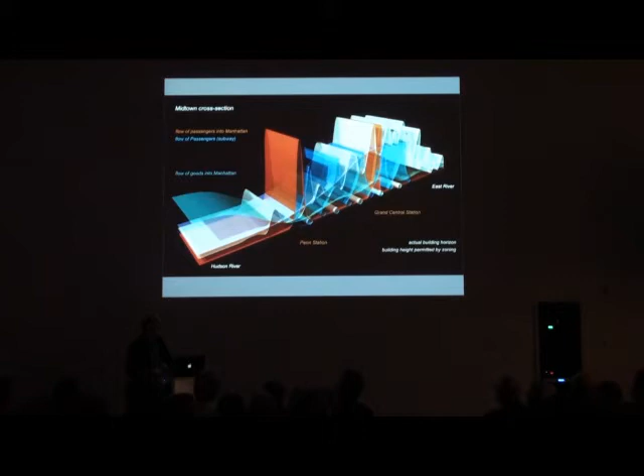Further on in this diagram, we started to develop a technique we called deep planning, whereby user groups, time, publicness on the site, accessibility, and how user groups were connected to the program on the site were researched.

This whole idea of deep planning then transformed into new models of design, maybe we'd call it now parametric design. But you have to imagine this study was done in the beginning of 2000, or even earlier, whereby some of it was not only there to introduce new formal languages for what we did with the computer, but purely to introduce new instruments for design, new forms of communication, new ways of delaying conclusions in design.

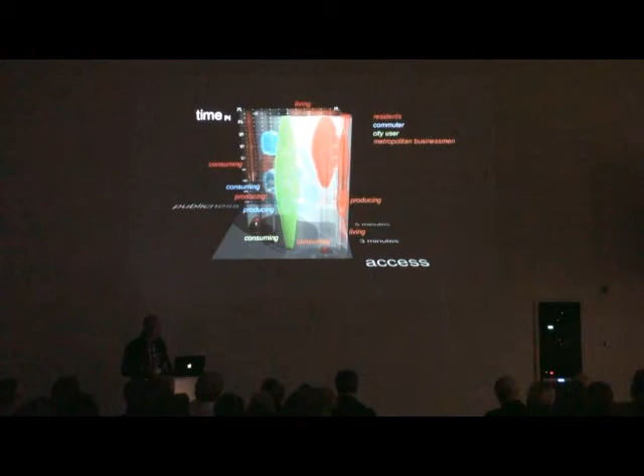I'd like to combine it with another argument - that we introduce a new reading in how one can understand program today. I start with the project we did in Korea, a department store for the Galleria. It was a really strange client, asking us in the beginning: can you rethink the department store in a totally new way?

We thought it strange in that sense, but then we discovered that the client was after something that would go beyond what was purely related to commerce alone. Today we know how difficult and important it is not to be so direct with clients interested in the iconographic or economic subtext of a project. We were so happy with a client who was fascinated by a project but could think beyond its own product.

We worked with the idea that a department store could be seen similarly to a museum, a place where lights give products particular attention. But for us the most important thing was the public spaces within the building itself, whereby in this escalator zone, for instance, you would see in the mirrors or half-shiny glass the way you might see your colleagues, friends, or family you walk with, so that the public space becomes a kind of catwalk within the building.

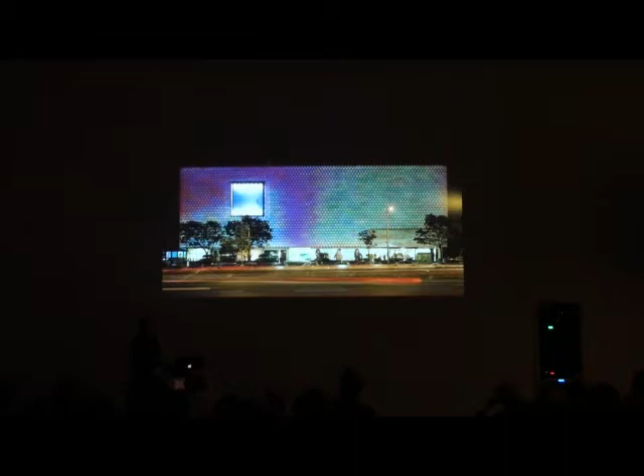This was quite early, around 2004. It was one of the first large LED facades introduced with a highly complex program, whereby we could change this building through all these colors, as you see here. So the idea was to rethink the program and give it a twist, another interpretation, a double reading, so the building becomes more public than only being there for the product alone, maybe highlighting the product on another level by giving it counter forces toward the public spaces.

As I said, this was a test, and it became successful, because a lot of people came back to the building and referred to it as a social meeting place within the city of Seoul.

Talking about this twist, in the Mercedes-Benz Museum we tested this idea on a literal level—almost on a formal level—so that the twist incorporates the construction, the opening up of moving from one floor to the other, whereby you suddenly get a vista toward the other layers within the building. This is a building with two spirals going down, up and down, and it's sometimes very difficult to know if you have already been there or there in the building.

This moment of the twist in perception is something you have to discover while going through the building, as if you were walking in a time machine, within the way this time machine generates so many different times as you walk around it.

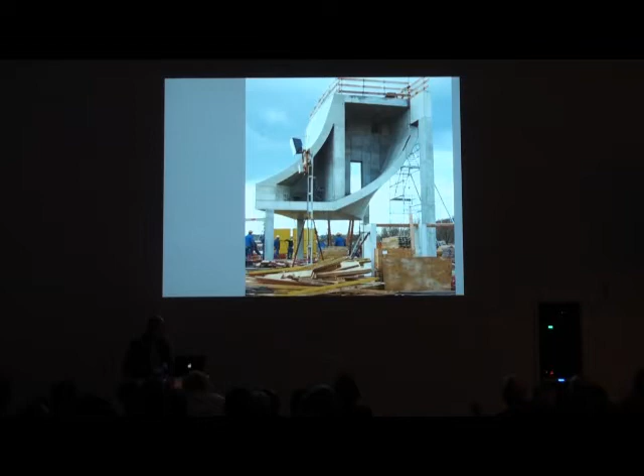We tested it at a one-to-one scale several times to see if the details of this part of the construction, repeated four times over the whole structure, could be built so that, with its casting techniques, it could easily be repeated within the structure of the project.

The organization of the building is such that you have the central atrium. Some of the exhibitions have an internal view and some have an external view. And as you can see, none of the floors match—they're all stepping up and down at different heights.

The central core, or 3 cores, are holding up the construction, but the construction is not guided only by these cores alone. The whole movement between the facade moves towards the floor and bends in a twist, which comes back here and there, and you see it partly here. They also hold up the construction on this part of the building, and in the facade we had a series of columns to hold up the span of almost 33 meters in the exhibition spaces.

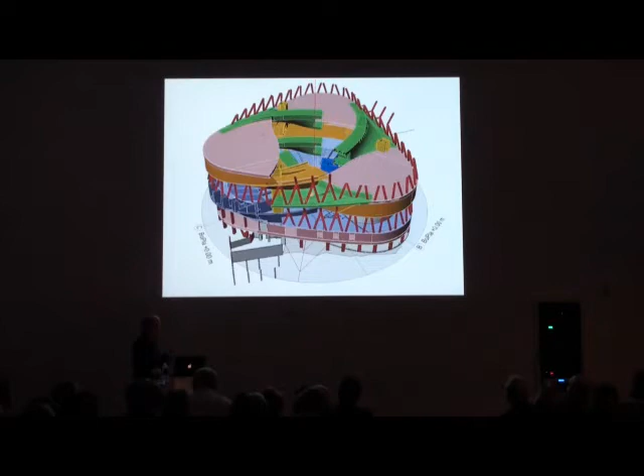You can see that here quite well, so here the twist is repeated 4 times within the building. But as I said, the diversity and complexity of the project is, in that sense, disciplined through these twisting constructive elements within the project, and creates a way of how this building is pulled together.

The principle of it is similarly related to this model, as you can see here. It's, as already said in the introduction, a mathematical model, in this case a trefoil structure, but the trefoil is here turned into a 3D model. You can see here that if you would build this model in the size of the museum itself, it needs almost no central structural element, because that's what we discovered in many other mathematical models - they adopt very easily architectural principles like construction.

Here, like we noticed from the Möbius strip - if you take a piece of paper and bend it over itself, the Möbius structure, in a band of paper, holds itself up. Similarly with this mathematical model, it gave us a fantastic opportunity to be almost, I would like to say, self-supportive.

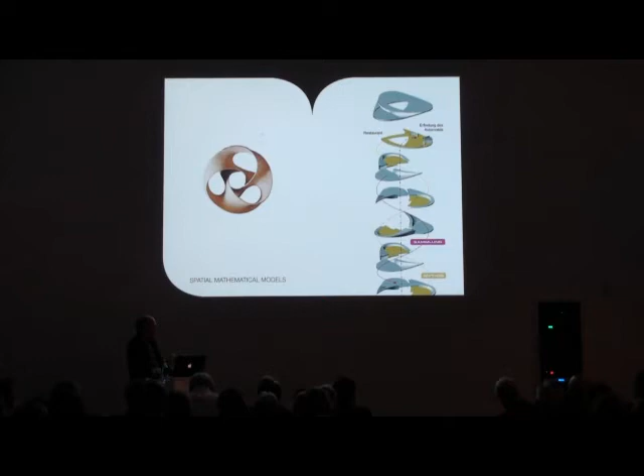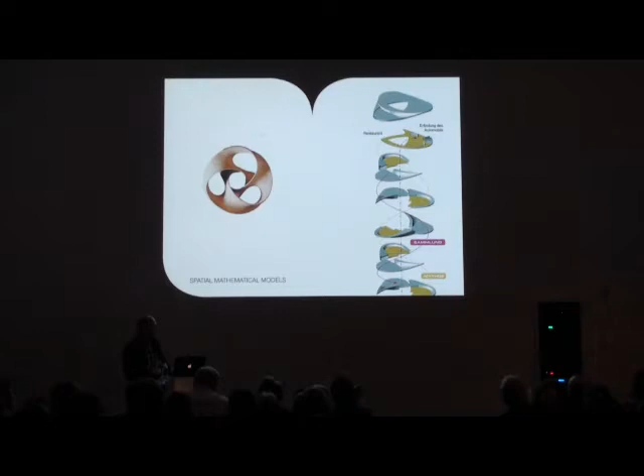As maybe seen here, the building is organized so that you take 3 elevators, and you come up at the top of the building, where one part moves through the history of the exhibition spaces, and another part moves through the collection spaces in the building. Sometimes you have these open view exhibitions, and sometimes a more internal view exhibition. But as I said, the 2 spirals are sometimes combined so that you can step over from one space to the other, creating this diversity and double route of the museum.

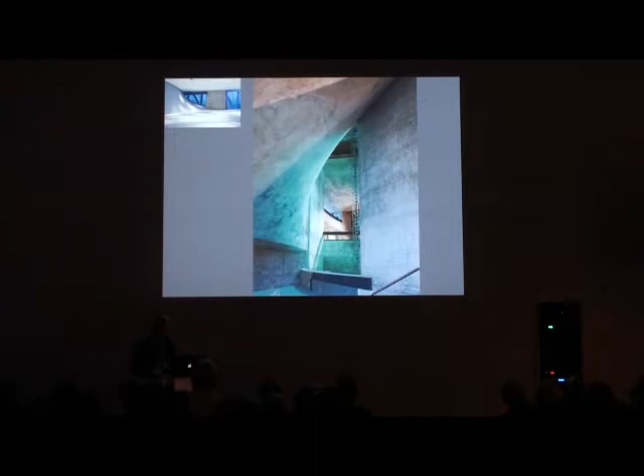Also here I'd like to explain that this client was not interested purely in a showroom. And in that sense we were lucky, because we had a dialogue similarly like what I said about the first project, about what could it be so that this building could be more than only a showroom.

Winning the competition, one of the directors told us they were so fascinated by our idea of how you would walk through the museum and perceive the objects within the building - you would step in higher in the space, like maybe this balcony, walk down and slowly come closer to the object, seeing it from different angles, different heights, different layers of experience, and then be able to choose what you want to see. You would select when you come closer to the car.

Actually this is what I used from many other possibilities I could not achieve in other designs or other buildings for museums I had designed. So all that was projected in this earlier part of the competition we designed.

But the director was so fascinated by the idea that he said it would be so great if he could see more museums and think more about the museum as a place where this car could be presented, and he referred to the MoMA. His argument was that if you step into the MoMA, the first thing you see is the helicopter hanging above you, arguing that a product like the helicopter is also an industrial design - so why couldn't the car, like a helicopter, be an art piece in a museum?

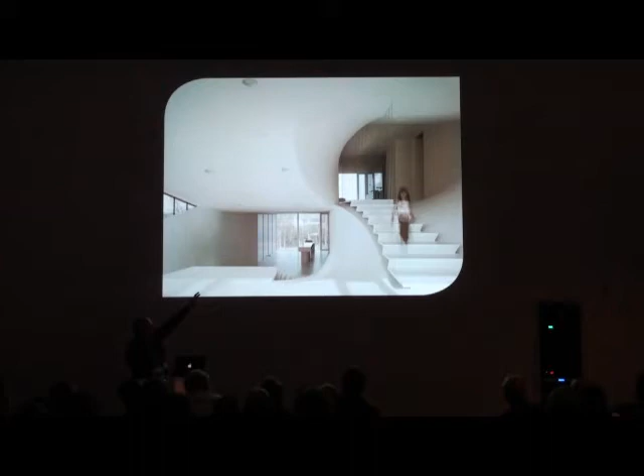The secluded elements of cooking, sleeping and living on this side of the house were combined so that this twist merged from the more box-like, rectangular part of the house towards the more softer, blob-like side, where suddenly all the movements and social activities, the interactivities between the members of the family, could start to appear in this moment of the house, and then slowly appear more in the living area.

So again, the formal language was not so much related to the way how the architecture generates a particular geometrical form. It's also there where it interacts with a public construct. This idea of the public and the perceptual, spatial construct is very important for us to introduce, in a way that sets up a dialogue between the internal ingredients of architecture and the way it is perceived and used within the organization of the architecture.

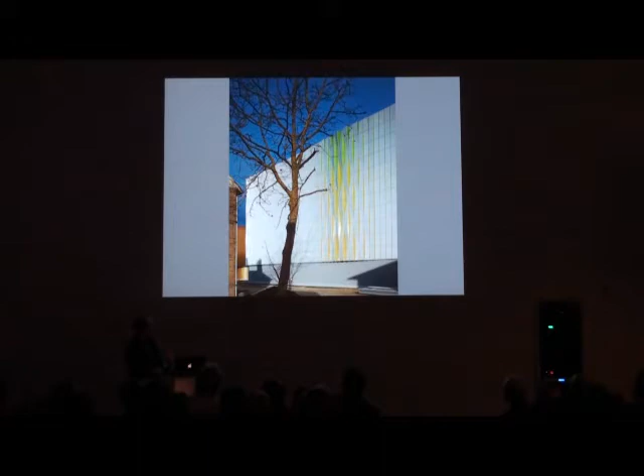So again, it is transformative, the geometry. It introduces a twist not only in the way it articulates a spatial organization alone. Like maybe in this facade, it starts as an equal potential organization, but then slowly moves into an open structure, and suggests, because it's a laboratorium which cannot have any window, an openness to its surrounding, where maybe it's not communicating with this tree in the winter, but in the summer suddenly starts to set up a dialogue with its green surroundings.

But that it opened itself up, that it is transformed, is some of the research we have lately been working on. Not only material-wise, but also organization-wise, when it comes down to the architecture and the formal aspect of the building as well.

So in this model, which lately became not only a diagram but a model of thought for design, this model of having on one hand a more equal potential organization, and on the other hand a looser, more infrastructural side, was used for many projects.

This idea of the transformative and the liberation of a geometrical, dogmatic principle was a test, or introducing a test, for many projects, like for instance the Arnhem train station, where on one hand we had offices, and on the other hand a train station with two bus stations, an entrance to a parking area, and a bicycle parking area.

So all the infrastructure elements and the public area were connected to this part, and the more quiet and secluded programs, which needed a more grid-like organization, were introduced on this side.

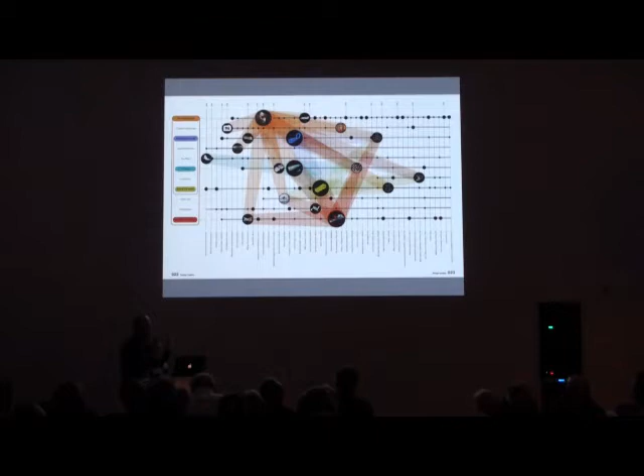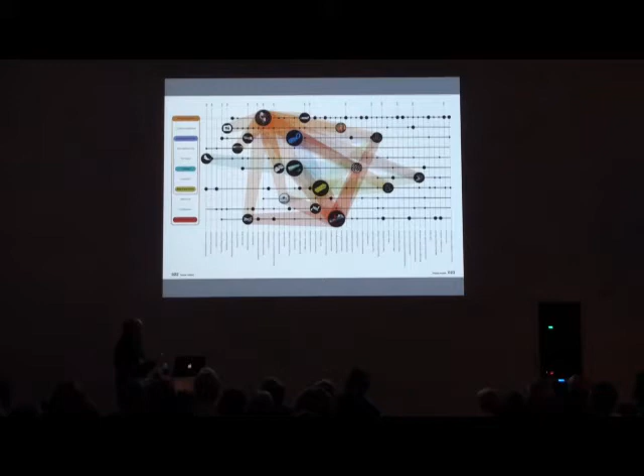And this aspect of how that could guide the organization of architecture on many levels, how it could easily adopt an architecture on many levels, was something we constantly tested in diverse models. Sometimes we called them mathematical models, where some principles were to be found, from the mathematical towards the V model as we called it, or the block, the box model as explained here. These models gave our work a serial quality.

And a guidance to the way how we did our research. So this is a bit more information on the house I showed you before, with a twist part in the middle, but also towards its context it connects itself very easily to the shift in the landscape. How the glass and the color of the surroundings connect to the extension of the landscape, and then is reflected back onto the house, is what I forgot to say in the beginning.

This notion of reflection and meditation of an image, where we can look at what generates after-images, is what we were after. Literally, that an image of a house could also start to generate a mirror of the artwork of the landscape was a similar study, an effect, I should say, we were after.

And also in the house, from the inside towards the corners, similar kinds of ideas on reflection were introduced. I read that idea of reflection in a double manner as well, because it was also connected to how one could literally meditate in the landscape.

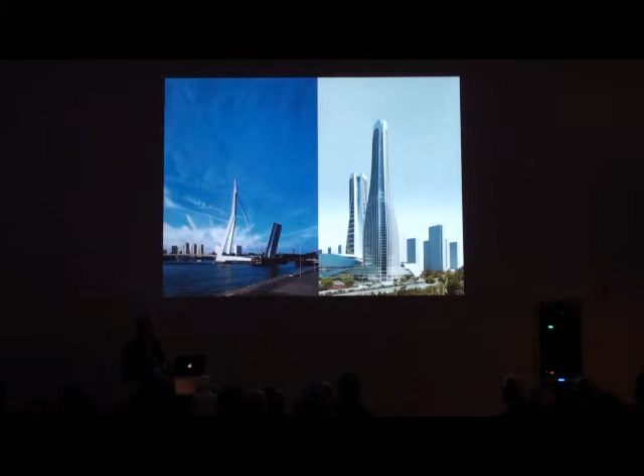This building directs itself toward that context, not only visually, but also conceptualizes something of that landscape aspect, as I explained. As you can see, it's a project with great diversity in its program—apartments, hotel, cultural programs, shopping on the lower part, more apartments and housing on this side, and even working spaces in this part of the project.

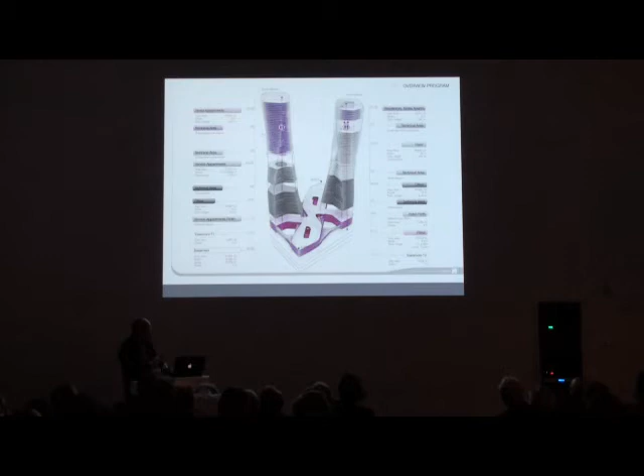As I had a wonderful discussion with the students this afternoon, what came up is what one can learn from today's architecture, and what we can learn from research and practice. I argue that today, although it's difficult to produce in a time as difficult as we're in right now, I've always believed strongly in production—the production of research, and at the same time producing architecture whereby you constantly learn.

For that reason I argue that the work is to be read in series, instead of promoting the idea that each building needs to be a highlight alone. In this project, I'd like to say it is fascinating to learn from China, in a sense to learn from quickness and from sustainable ideas that are heavily promoted right now.

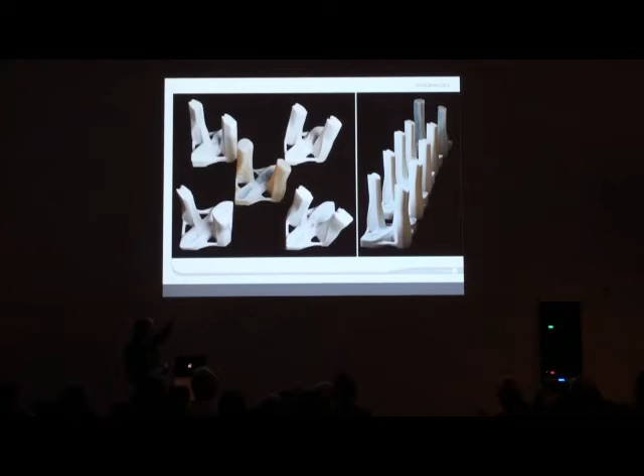I noticed this a lot in Asia, especially China, on the urban level as well. Here we're going for everything related to the most extreme when it comes to dealing with the energy of the building. The twist of the facade is connected to how we can lower the energy load on the south side, where it could be closed as much as possible and opened more on the north side. We constantly test how this formal aspect of the building relates to sustainability.

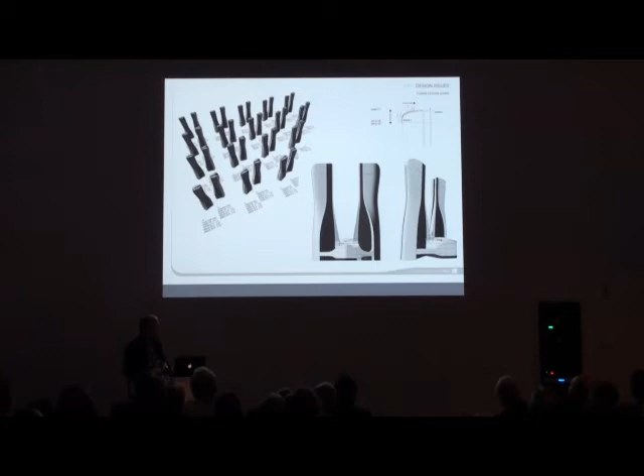Sometimes, I don't know if the dates are shown here, but sometimes in half a day we could do these tests, because the dialogue with all the specialists on board wanted information the next day, since it needed to be built soon.

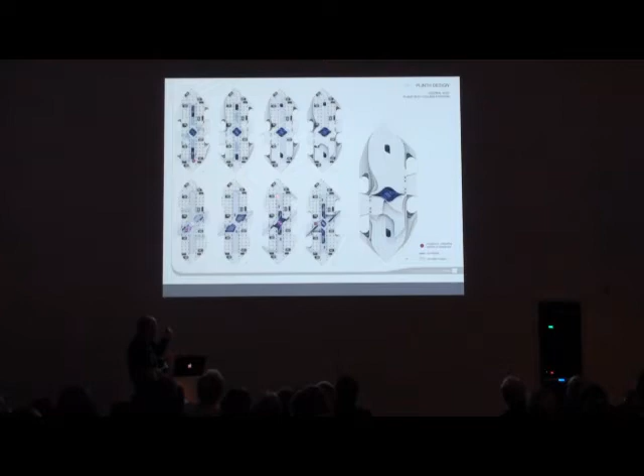Similarly with the construction, we played, rightly or wrongly, with only column systems. Here in this case, the atriums and the shafts all played a very important role in how the construction came together.

Here you see that study on how this facade relates to the energy load, closing it down on the south side toward its openness, was introduced here.

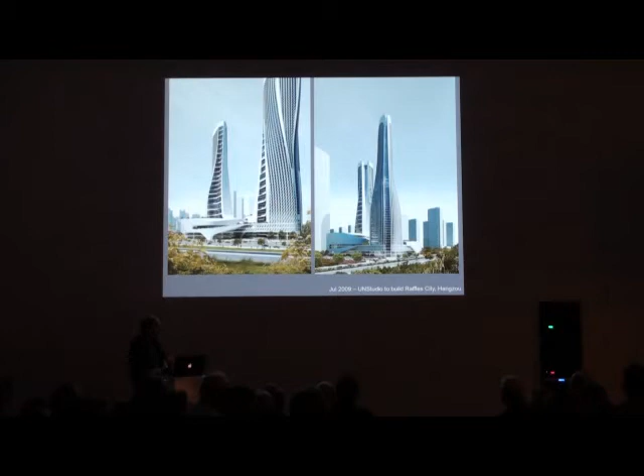The project is right now under construction, so the foundation is already on the ground. You have to imagine this is a building of close to 200 meters high, and it will be finished next year, end of the year, with everything in it. So in two years' time - what would never be possible in Europe.

Here we argued: how is it possible today, as an architect, to control the internal regulations of architecture in relationship to external influences? What is it that we can do in order to communicate between what we need to do and how we guide information?

I've always thought that the aspects of not only pure political, social, and cultural effects on architecture are the most important to work with, but also that it is constantly tested around the internal regulations of architecture - the geometry, the construction, and how one experiences it with the latest production techniques. That's why these pavilions test these production techniques and become, in that sense, the testing ground for a form of reversed engineering to its design.

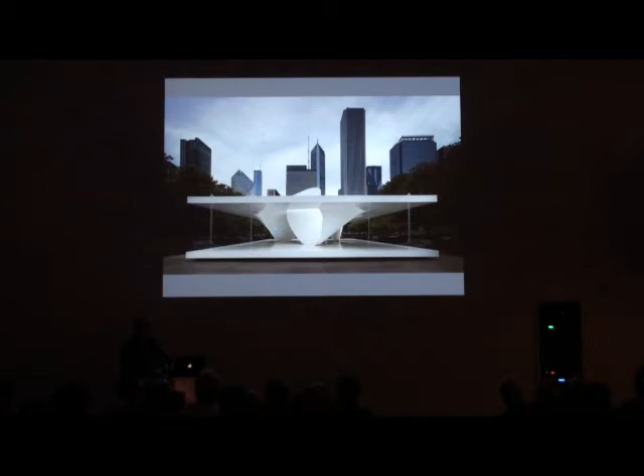And you can see here that sometimes in the evening this became a very active place.

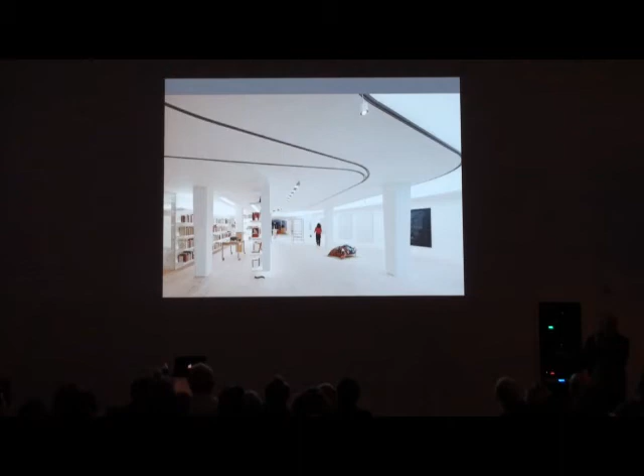You see some of his artwork here. It was really a wonderful project to work on, whereby the idea of artificial light with daylight in the exhibition space or living space was introduced. You cannot see it so clearly here, but his furniture is organized so that on a carpet you can move it constantly around the exhibition space, so that he and his family could sit around another part of the collection and have, for two or three months, another environment in his own house.

Similarly, the books are for him part of the collection, and introduced in the house so that they are presented as part of the collection.

And again here, it's not so clear with this evening image, but especially during the day, you're drawn to these dynamic parts of the collection.

So this aspect of the play of geometry and the walls, constantly drafting you from one part of the collection to the other, giving a particular kind of individuality to the artwork from many sides, is a play we tested here in relationship to the lighting and the way the walls are tilted up, so that all the air and installations are connected to that as well, whereby the floor becomes one continuous element giving an expansion towards the house.

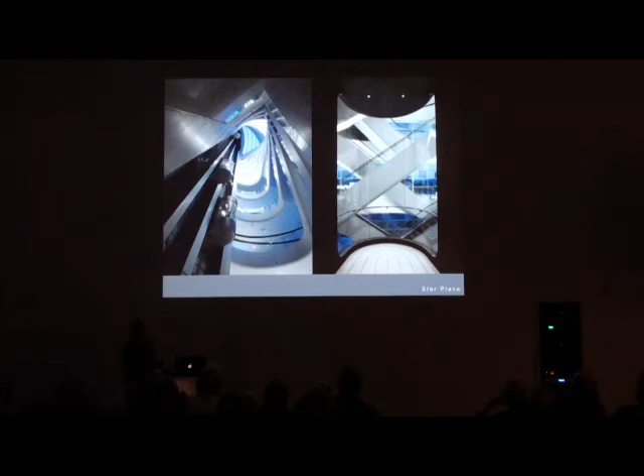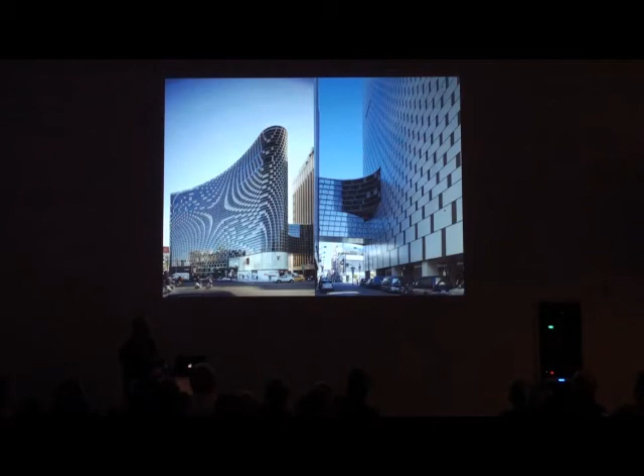From the experience of a house that could be projected to its ideas around Asia, as I said before, the infrastructure of the architecture, the way that might transport itself to its facades, or the way we play with these aspects in architecture have been constantly on our mind to make an architecture that is communicative and draws people back to it - whereby in this moire effect of the facade, it's not clear, especially during the day, if it's having 2 or 3 layers, whereas at night it gives you even more layers. Sometimes you can see that even the internal part of the building comes through the facade as a 3rd or 4th layer within the building - something we worked on here.

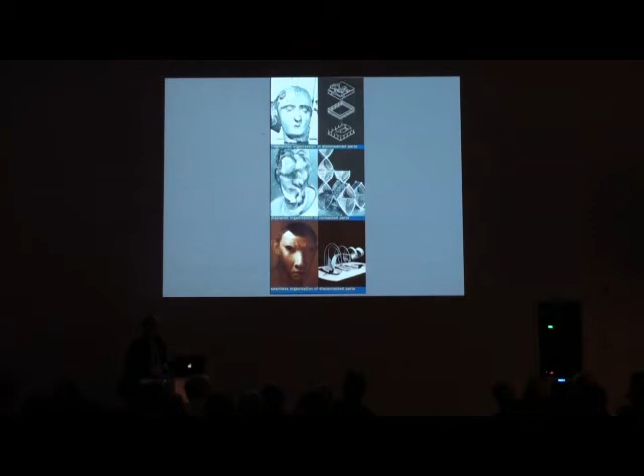As I try to argue, today architecture can be seamless, but it's not only to be like in this image, where you don't see seams anymore. I'm not arguing for either this type of architecture or that, but that the transformative aspect of what's possible today is that we can be far more radical and open about, and more extreme with, the organization of architecture - which is today the most fantastic thing to work with, more than the seamless or seam-organized architecture alone.

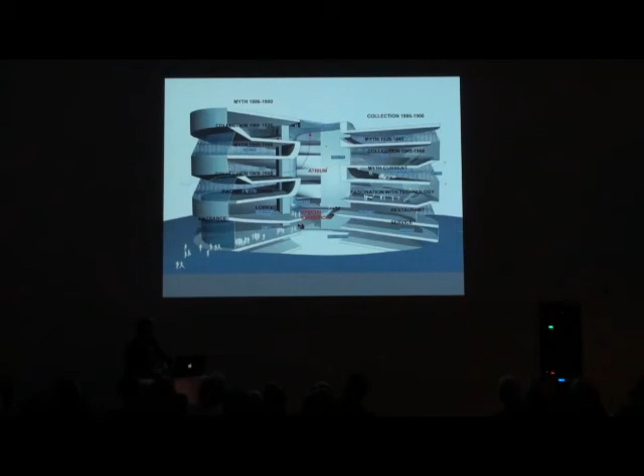As in the project I showed earlier, I'd like to extend a bit on what we did with the Mercedes-Benz Museum - the whole idea that a line turns into a surface and then becomes a volume, so that when you walk through the building, it's almost like with this pen, you cannot put it off the screen anymore. That constant feeling of diversity in the building, where you have the feeling that spaces are following you instead of being in front of you, is something highly essential in this project.

Model making was part of the process. It's not that we only work with geometry or the computer alone - we make so many models to constantly test the operative aspect of the design. What I forgot to say earlier is that the deductive and inductive aspect of architecture in its design process needs to be operative - it needs to be constantly in play, in the way you can refine it and push and pull it, even where it needs to be done quickly, the process needs to remain the same.

Also here we had only 1 year to design this project, and again 1 year to build it. We learned so much from this project because the client wanted to be highly competitive with another building - probably from... well, I'm not going to say, but it's a project in München.

But it's also from a car manufacturer. Here, we were asked to design a model in a scale we didn't understand, I think it was 1 to 13 or something. The scale was given by the client, and for months we worked on it, constantly asking why the client wanted that scale. We later understood because the client came with a little car, and I put it into the model, and that was the scale. So that's why it was introduced in this manner.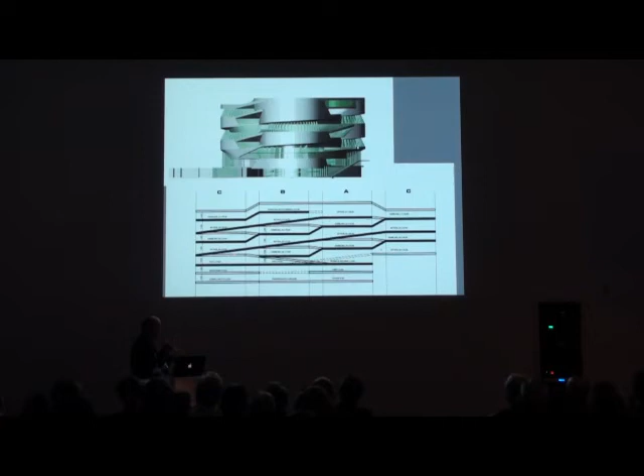These are some of the exhibition spaces with these views I talked about. And what was really wonderful here with this project was that we had the possibility to do everything in-house.

Also the whole aspect of how the lights could have such a quality that you would not look into them, that they would actually be controllable with so many new techniques, giving the objects fantastic lighting, also with a very light floor. The light floor was important because that's what I learned in another museum: if you give a light floor to the objects, the reflection that comes back onto the car is highly essential. Also, with the light floors, we could reduce the amount of energy close to 10% in the building — the energy of lighting.

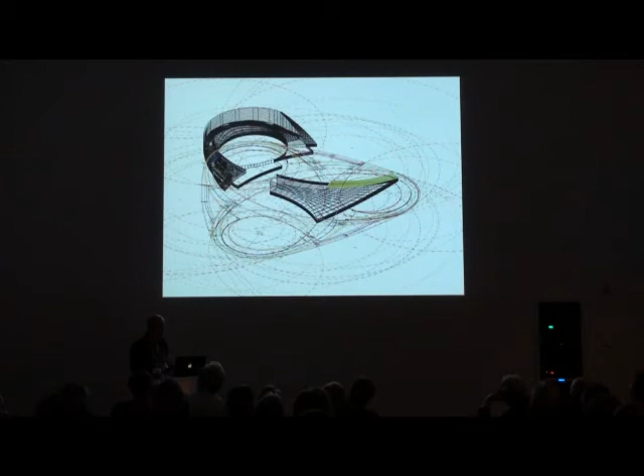What we discovered is that the computer generates so much wonderful infrastructure for communication with all your parties, but it's not there for the formal quality of the architecture at all. This is what's been so promoted in architecture over the last 10 years, that the formal language of architecture is expanded by means of the computer, and I would say not at all.

The way the computer has revolutionized architecture is only in how we can communicate with the computer today, and that's how we should use it.

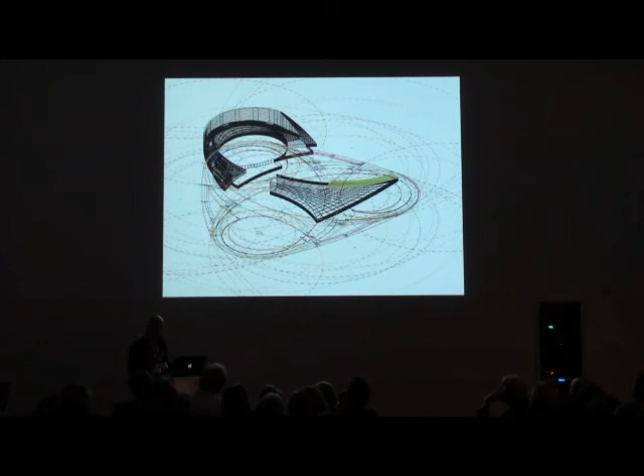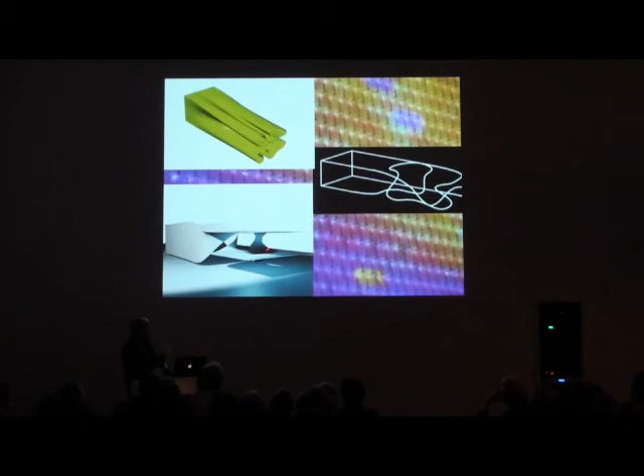This aspect of the transformative is key, and how the transformative can turn into a cantilever, in this case in this music theater in Graz. A black box with a public space on this side that you can move into, and then you frame it. But the frame itself is not so key.

The key is how the organization of the architecture comes together, and how, when you step into the music theater, in this public space you can look at music—and maybe looking at music is as important as listening to it.

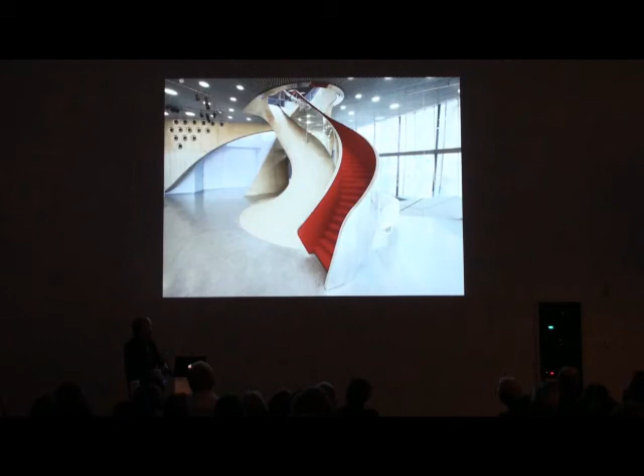By walking up into the foyer space, which is more or less column-free, different performances can be held there, where the building becomes more public.

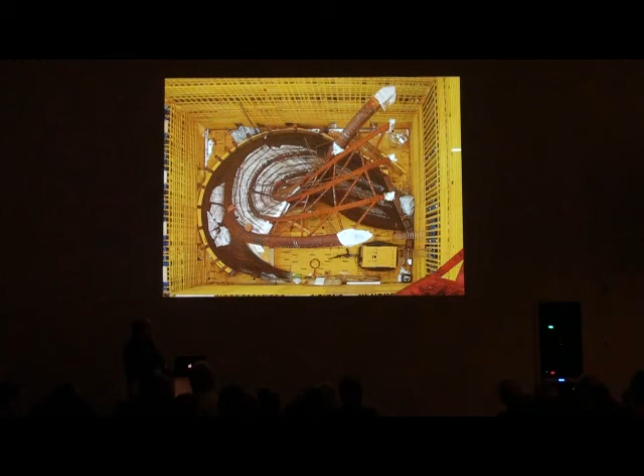This is the twist in the middle of the central part of the building, which holds up all its floors. The way we did this was to push the concrete up rather than pour it down, so we wouldn't have any gravel edges coming to the sides of the concrete. So this is essentially the only column, you could argue, that carries all these floors above it.

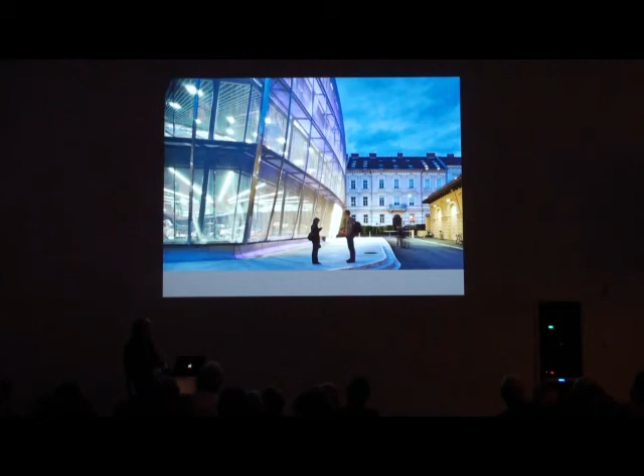That idea of the articulation of the graphics in the spaces are spatially also coming together out of the building itself. Its facade suggests to be closed, but then when you come closer, it suddenly opens itself up. Here's one of the students going to the theater because there's a performance that day, and at night it really opens up even more.

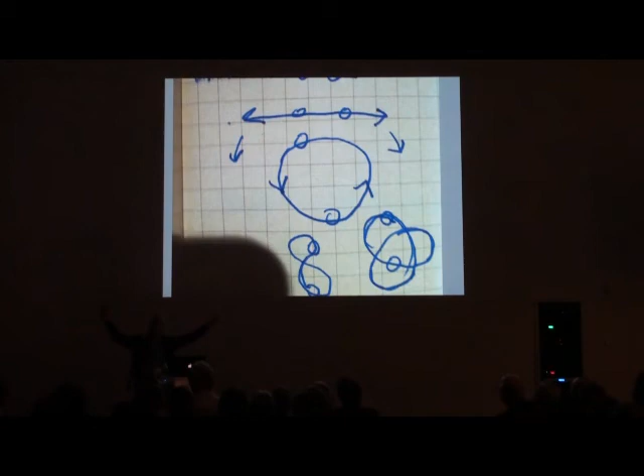This was a diagram I was actually drawing quickly after I had the dialogue with the students, whereby I argued today we can expand architecture far more faster than we know. Before, architecture's principles of functionality and aesthetics were so close. Now we can stretch it much further by the utilities of architecture and the possible readings of architecture, from the way it could connect itself to art, fashion, science, the way today it can be experienced on so many wonderful levels.

Today, if you want, you don't have to know where the utilities or the reading of the architecture come together. You can put this line in a circle, or into a puzzle, a new form of a category of a mathematical model, like you see here in the trefoil. These principles can sometimes be pointed at randomly and maybe sometimes not be recognized for what they are within the architecture. And maybe this line refers more to the grid behind here, like the grid of Manhattan, where the consumption and the production and the high finance came out of this geometrical principle. But is the grid not to be rethought with this more classical model of how we were thinking mechanically in architecture?

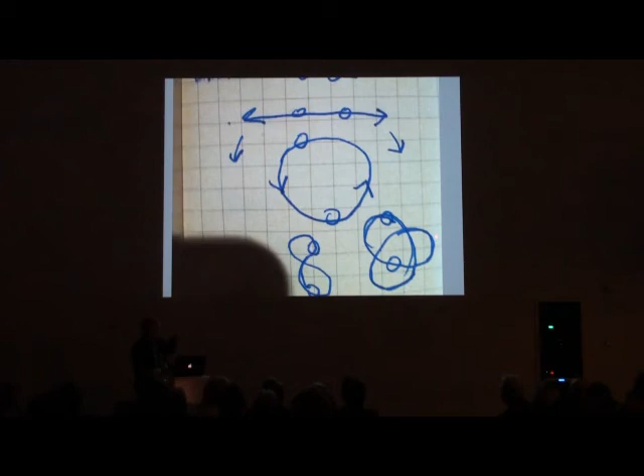I trust you'll take some questions. People don't do that here. I have a sort of maybe. Well, anyway, I have a question.

Everyone can hear me? So your project's clearly invested in looking at these formal techniques like the Mobius and Klein model from a kind of exterior position, looking at them abstractly. But it's also very invested in the perception of that form, and the way you showed the slides and finished with the camera, which is kind of coincidental, I guess. You're always showing us these views where you're very invested in the perceptual effects of these forms as well, not just the geometric possibility of them. And then there's a couple projects you showed, one in Kaohsiung and one in Korea, that have these sort of pixel walls, pixel media walls. And some of the other surface projects have a surface, there was a lab project with the kind of yellow. I'm mostly interested in how you look at these pixelated surfaces, where you could show anything, you could show a movie, but you're having to somehow choreograph or syncopate or design that experience of these pixelated surfaces. How do you see that in your work, in your taxonomy of types, in the way you showed all your projects?